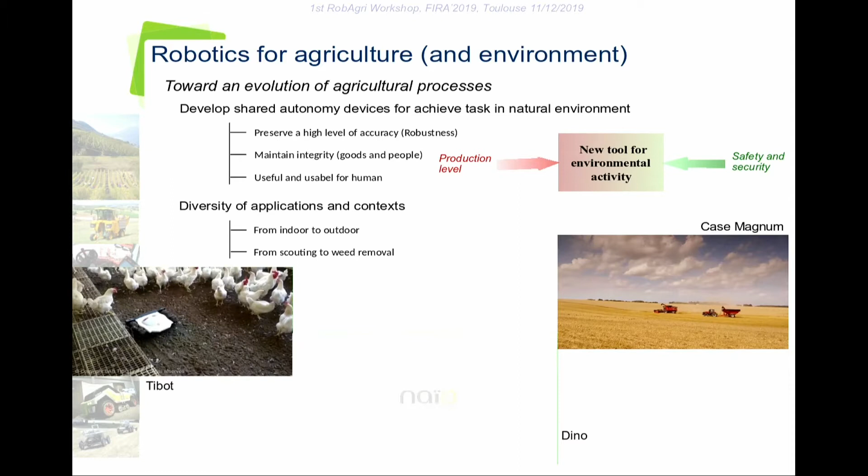Robotics can help with that, because if we want alternative solutions to use treatments and have agricultural processes without chemical products, that means you have to go into the field more often and make very accurate work. That means you have to spend a lot of time in the field, which is not possible right now because you need more and more manpower, and it's manpower for a very difficult, hard job with increasing penability.

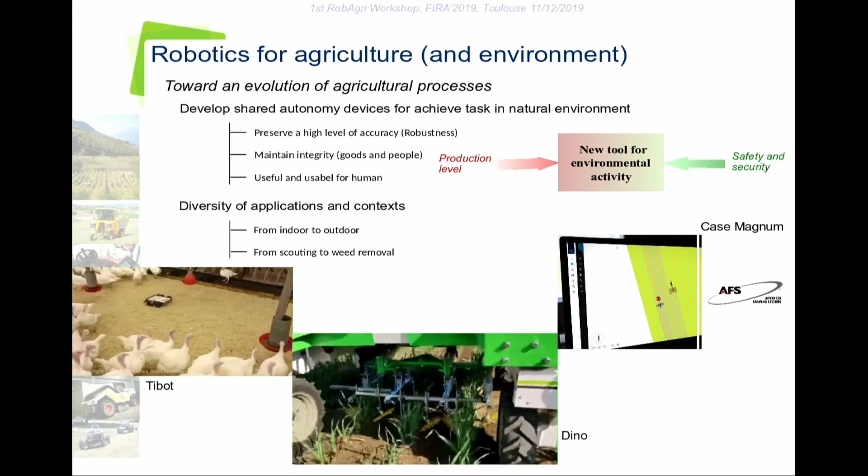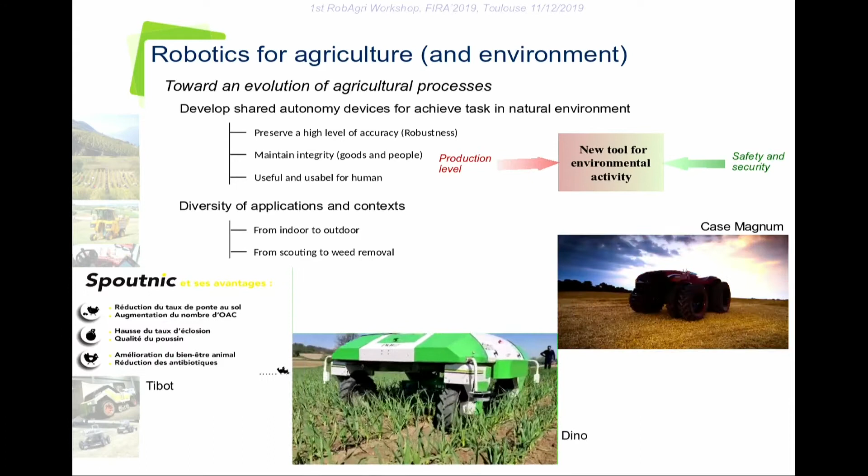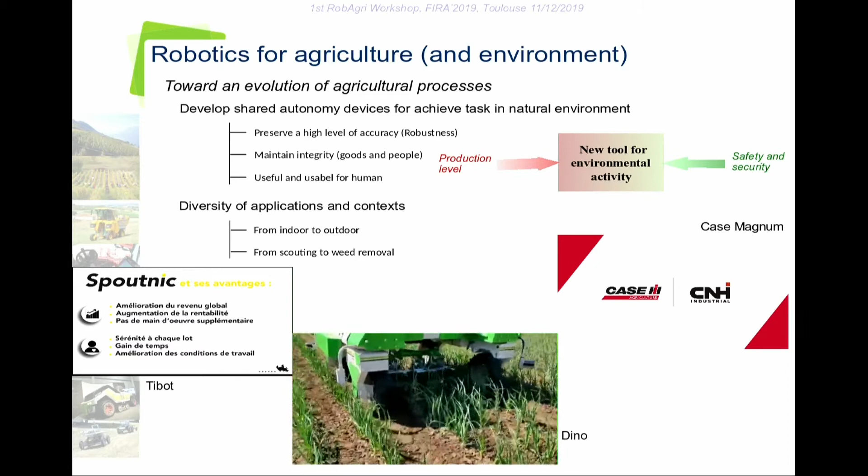So robotics can be one of the potential ways to move toward agroecology and biological agriculture. In fact, there are already a lot of robots in the fields and farms. You have seen this because we are at the International Forum of Agricultural Robotics, so you've seen there are many kinds of robots present, showing a big diversity of applications.

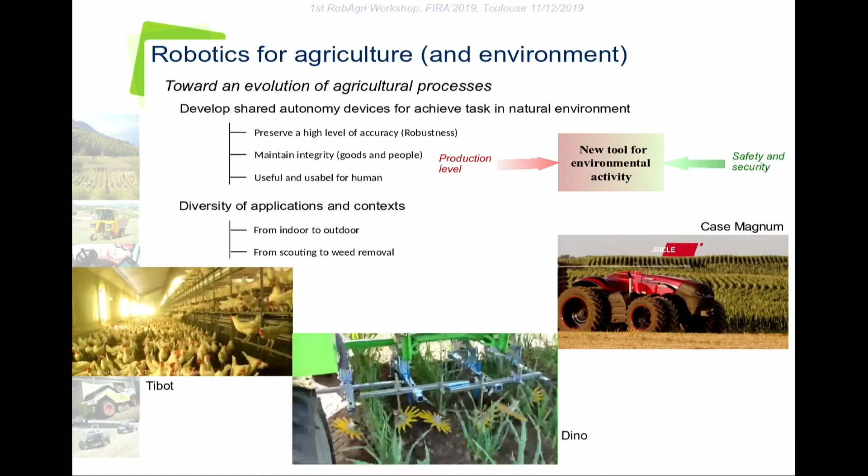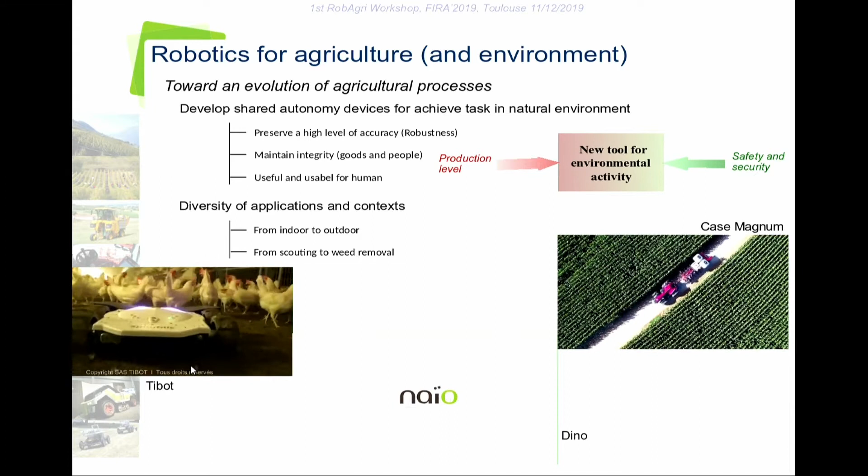We have a small... okay, I tried the pointer for the first time, it's not so easy. You have a big diversity of applications and things to do. You can see in the hall the small Tibot robots, just to move inside the farm and make chickens move, and so on—very small robots. There are also middle-sized robots.

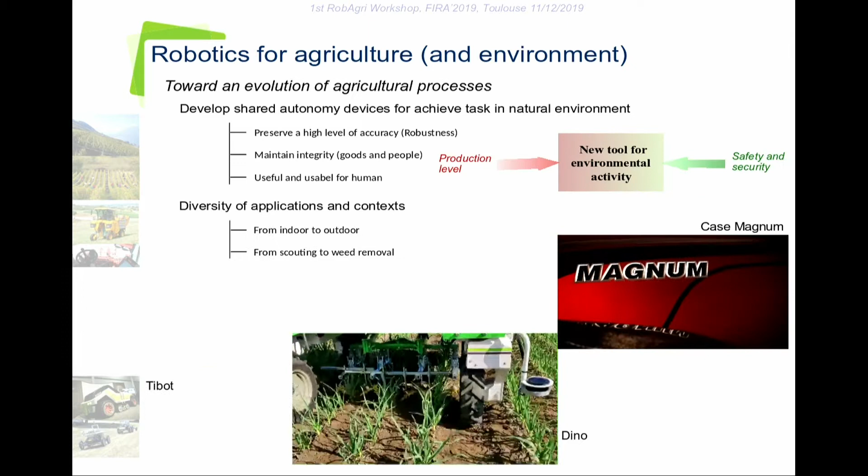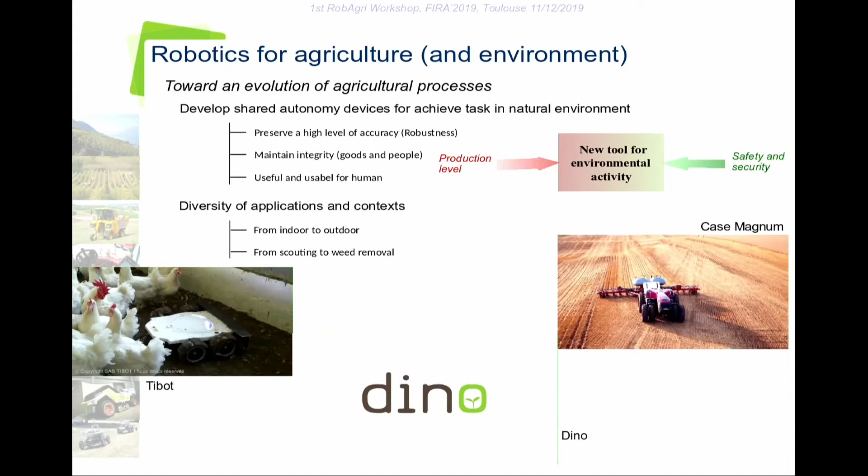Of course, we are in Toulouse, so you can see Dino robots also inside the hall—a robot dedicated to going through the fields for weed removal tasks. So here we have robots of about 10 kilograms, robots of about 500 kilograms, and at the opposite extreme, very large robots such as the Case Magnum, which is used as an automated tractor.

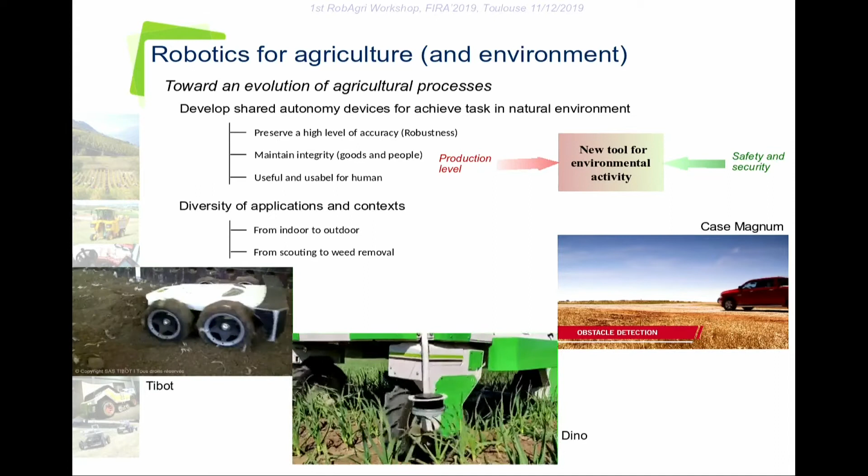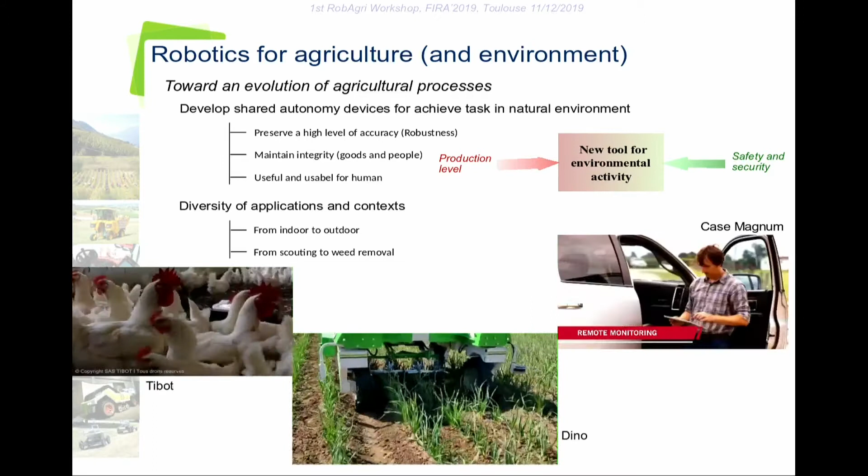The idea is that it's able to do exactly the same things as a conventional tractor, but without a cab and without people. These few examples show that if you want to manage robotics in agriculture, you have many different kinds of terrain with different shapes. You can be indoor or outdoor, in wet or dry conditions, with sunny or rainy skies—a huge collection of different conditions that the robot has to adapt to.

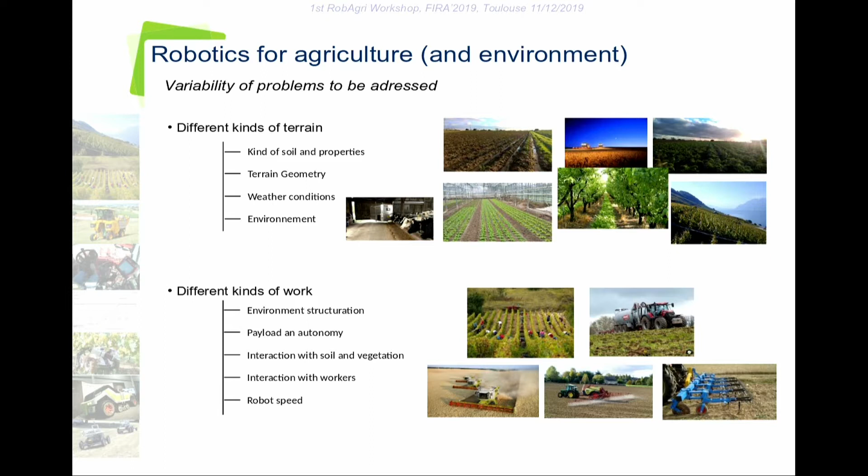The robot also has to adapt itself to different kinds of work. We've seen it can move chickens, follow people to help them do things, do mowing, do planting, work at different velocities, and use different tools and implements. So there is a huge collection of tasks to do and a huge collection of environments in which we have to move.

In order to address all these kinds of conditions, it is difficult—there are some scientific locks. One of the first scientific locks is that robots have to take into account this variability and diversity of tasks and fields. I've put some examples, mainly from the RobAgri association and its partners.

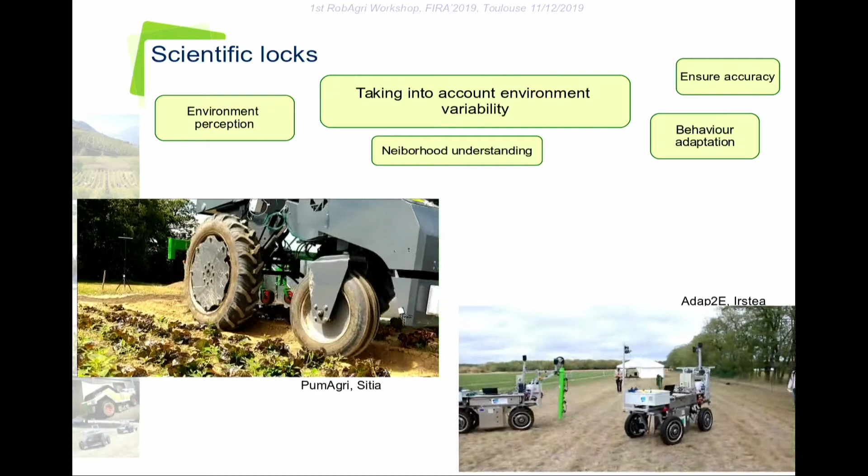For instance, in the PumAgri project, the robot has to move along rows using a laser. At the end of the row, it has to perform a turn, so it can't use the laser anymore and has to switch from laser-based trajectory following to absolute trajectory following. You have to plan, then decide and select different behaviors with respect to the space—where you are in the field—and with respect to the situation, what you have to do.

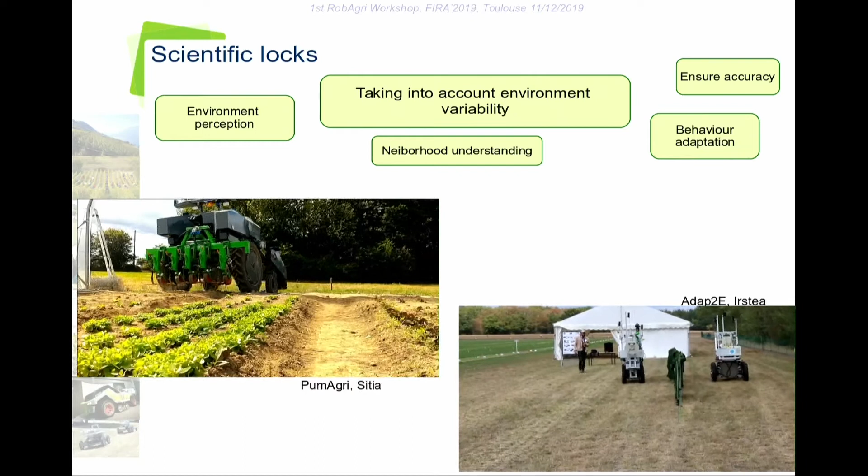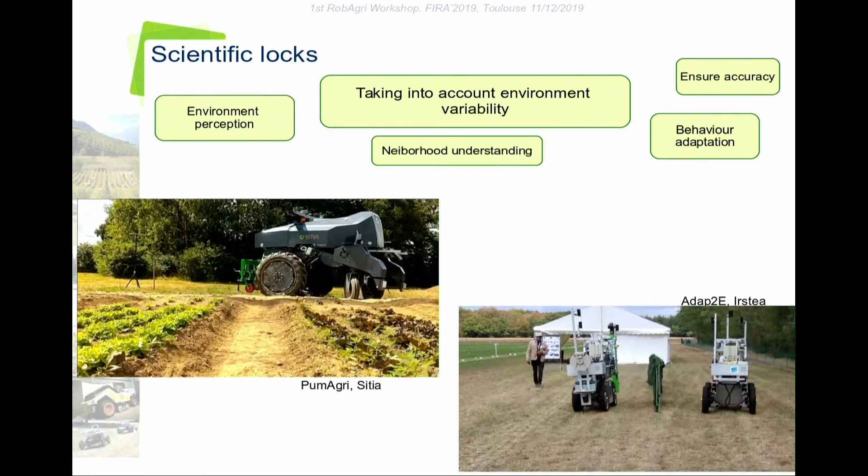It's about the same with the Adap2E project. We have one robot following a row of vegetation—currently artificial vegetation—which can perform spraying, in association with a second robot, so we also have to make decisions: do we have a structure to follow using LiDAR, or not? Do we have a second robot, or not?

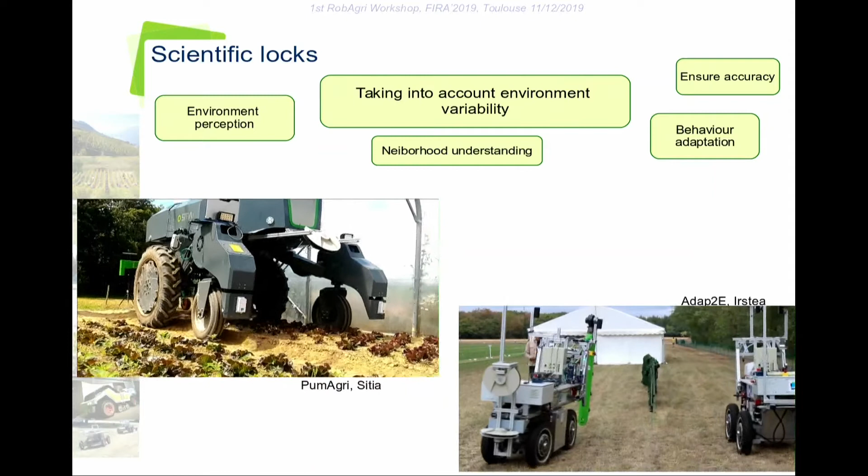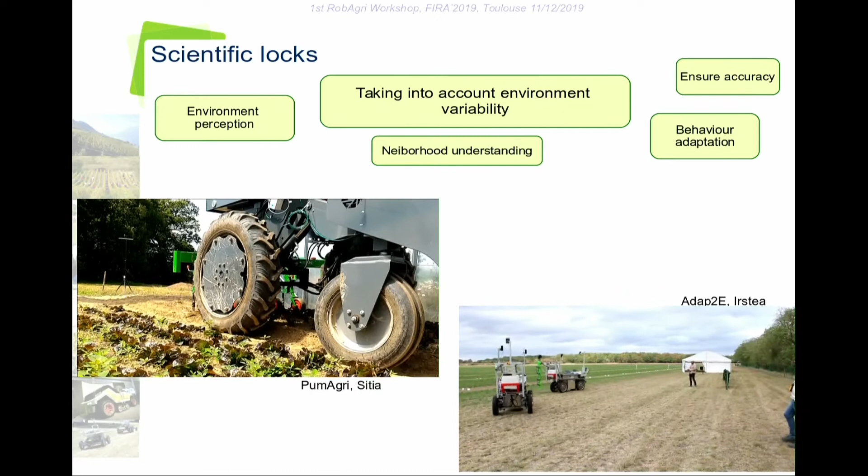Does the second robot have to be on the side of the first robot, or one behind the other? You have many decisions to take, and this is still scientific work because we have not yet totally solved the problem of decision making in unexpected, dynamical contexts such as we have in agriculture.

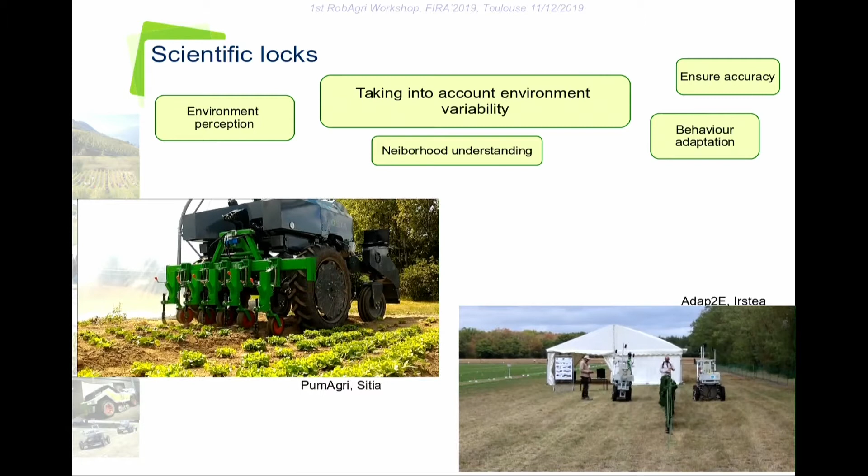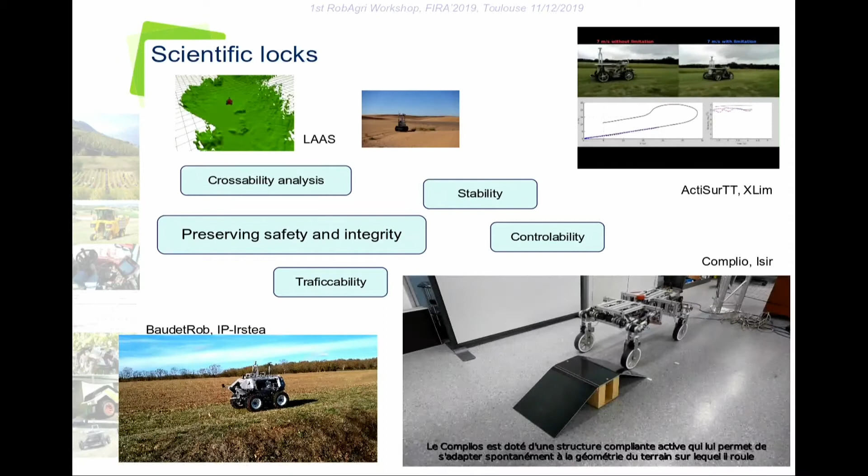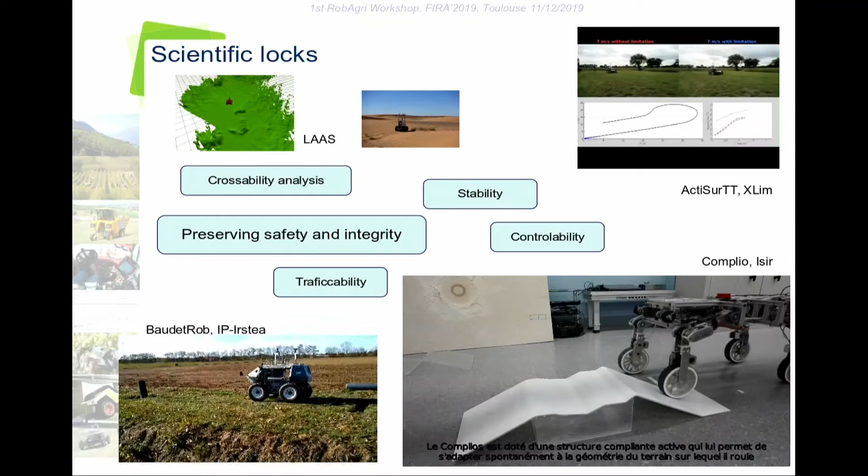One of the second important scientific locks is safety: how to preserve safety and integrity of the robot, how to be sure there is nothing in front of it. There is still progress to do, maybe in the numerical terrain model, in order to see the geometry in front of the robot, since it has to know what is in front of it to decide if that space can be crossed or not.

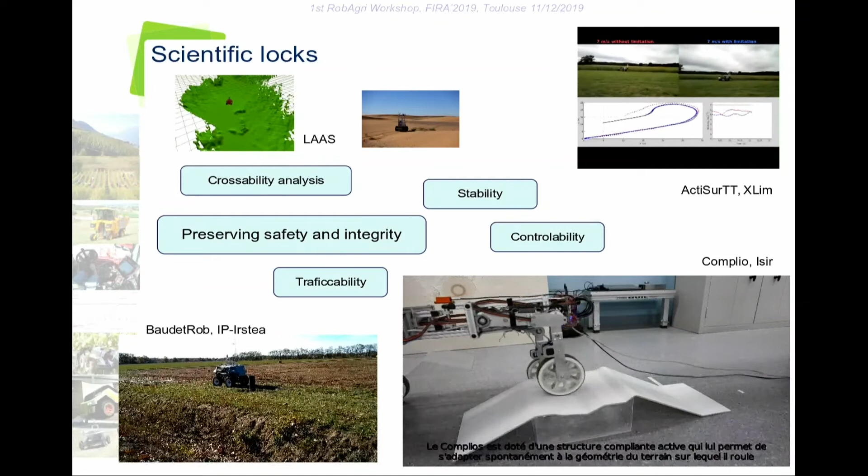So we have a lot of work on these topics lately. We also have to take into account the dynamical effects of the robots: what is the maximal velocity you can move at in order to preserve stability? We have an example with the XLim laboratory and IRSTEA, one result of the ActiSurTT project.

It's not easy. Here we find the maximal velocity with respect to preserving the stability and controllability of the robot, because depending on grip conditions, you can turn very fast, and this can lead to a spin around.

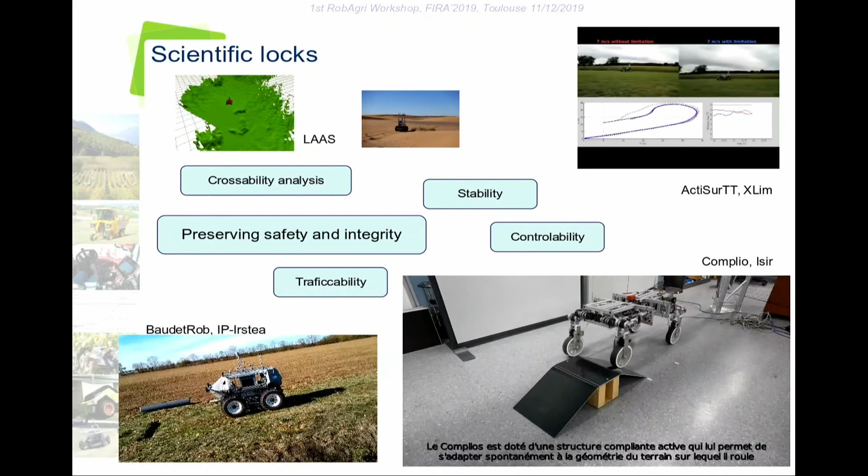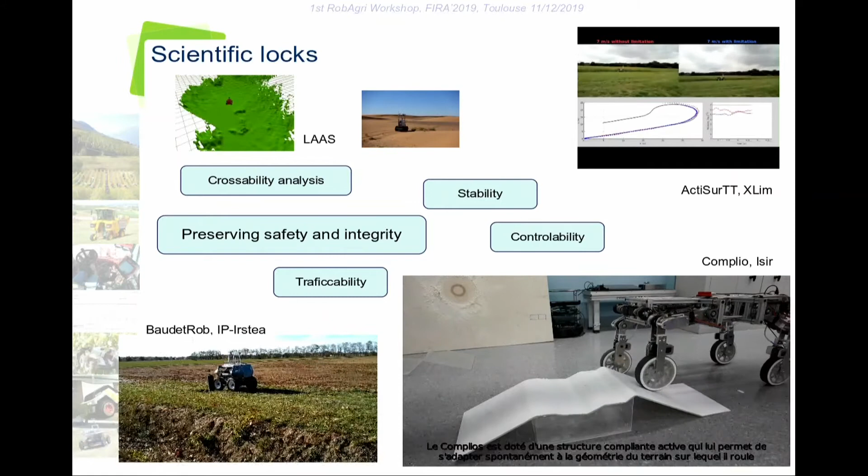Or loss of controllability, or steering actuator saturations. We also have to decide at a given moment what is the maximal speed to cross a geometry. Here you can see we are doing research in RobAgri about the maximal velocity to cross a hole, or the maximal velocity to cross these obstacles - sometimes it's zero, because you have too much angle change, and then you have to avoid it.

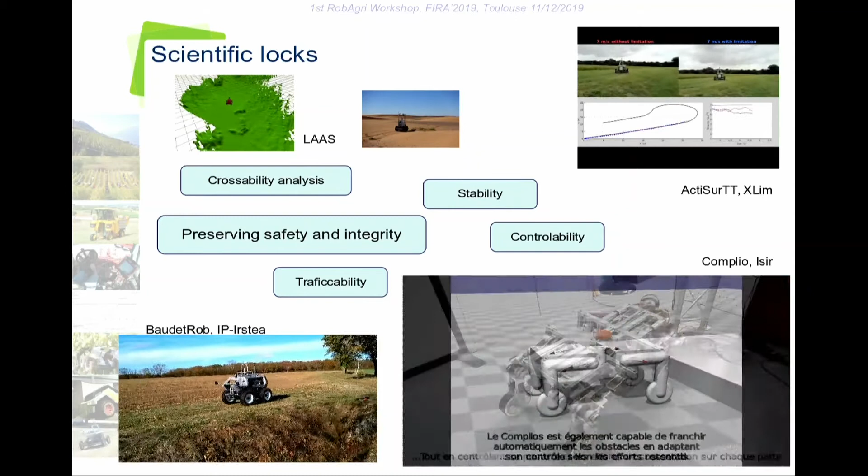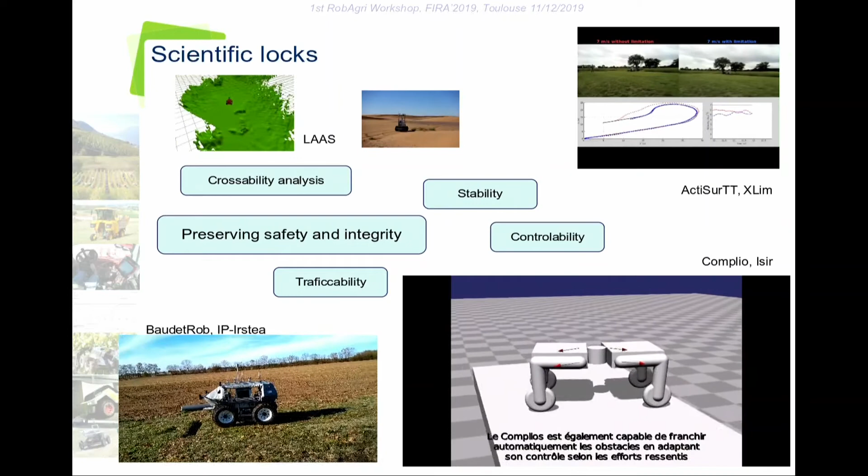We also have research led by Isir in Paris about reconfigurable robots and wheel-leg robots, which permit adapting the position of the center of gravity, including its elevation, with respect to the obstacle.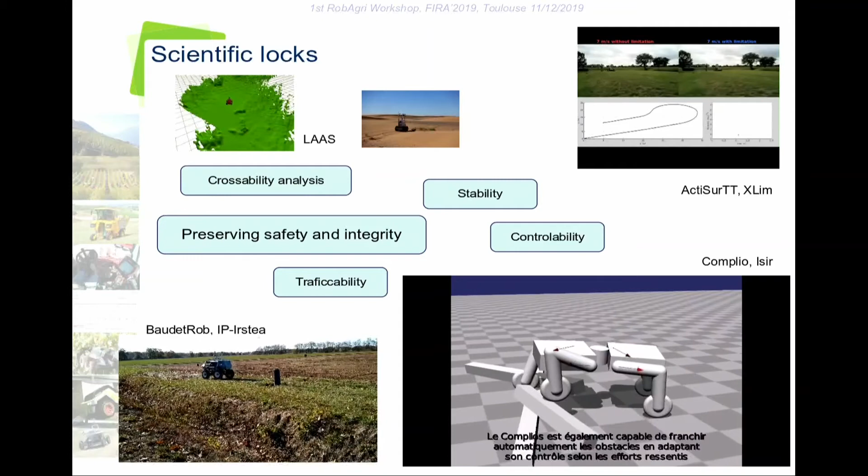This is basically done with deep learning, using simulation: the robot crosses nominal obstacles and learns how to change the position of the leg with respect to the obstacle and with respect to onboard sensors - basically force sensors.

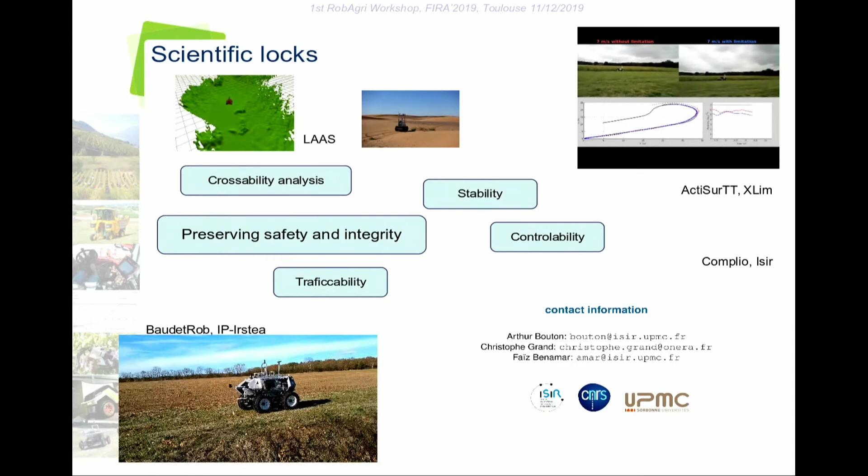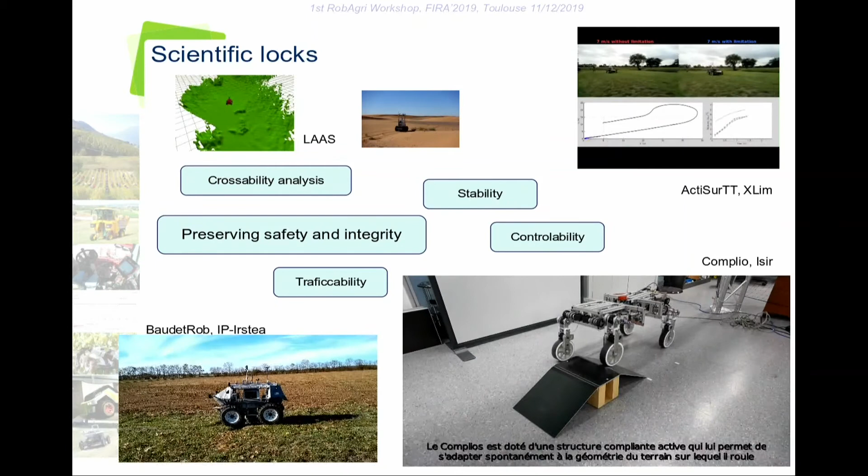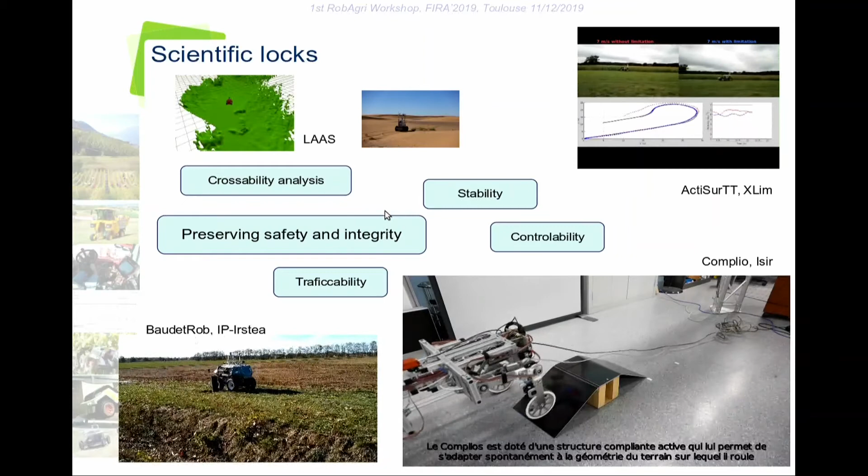Then, once all the learning is done through simulations, you can move on to actual experiments using the Complio robot you see here, which is able to change the position of the wheel with respect to the terrain geometry, in order to preserve stability and horizontal positioning of the robot.

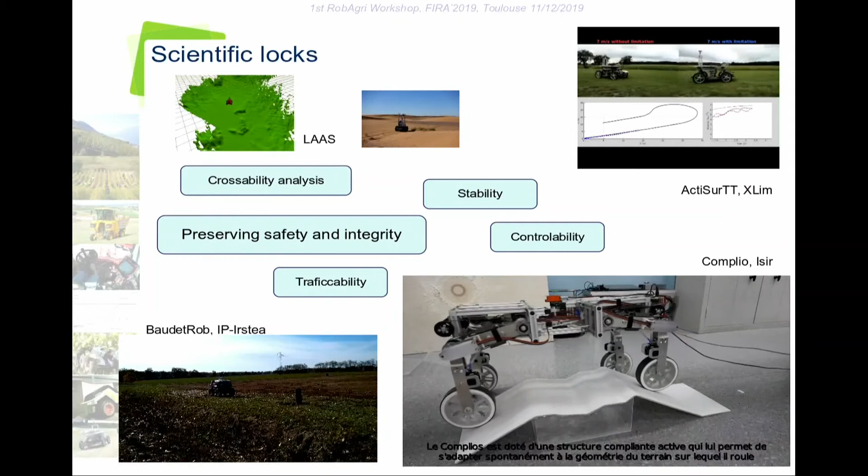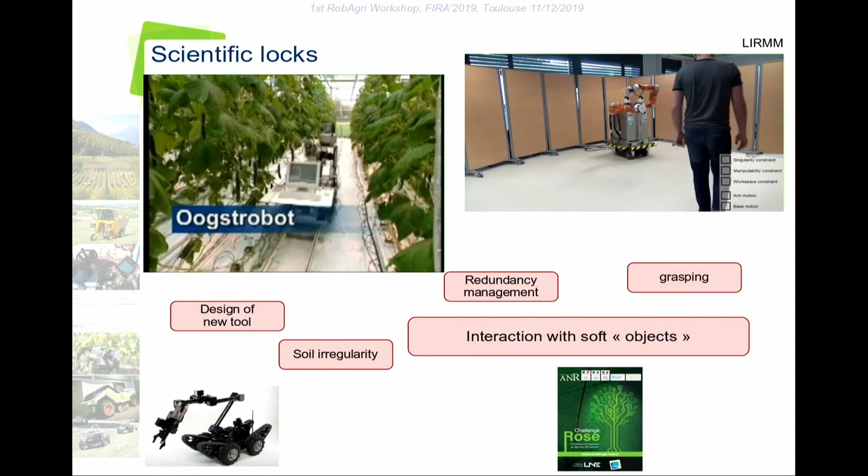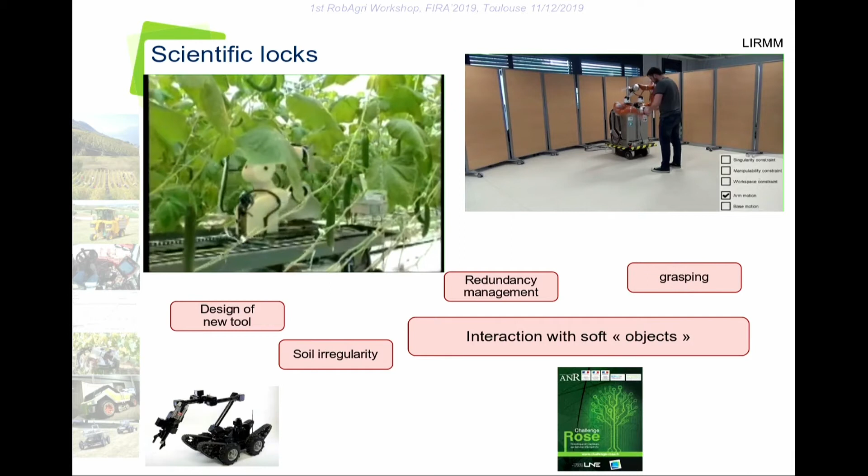So this is the second of the main scientific locks. The third one we have identified in RobAgri is how to interact with soft objects - how can you manage the interaction of an implement with vegetation and with soil, because the main task in agriculture is to interact with and do something on the fields.

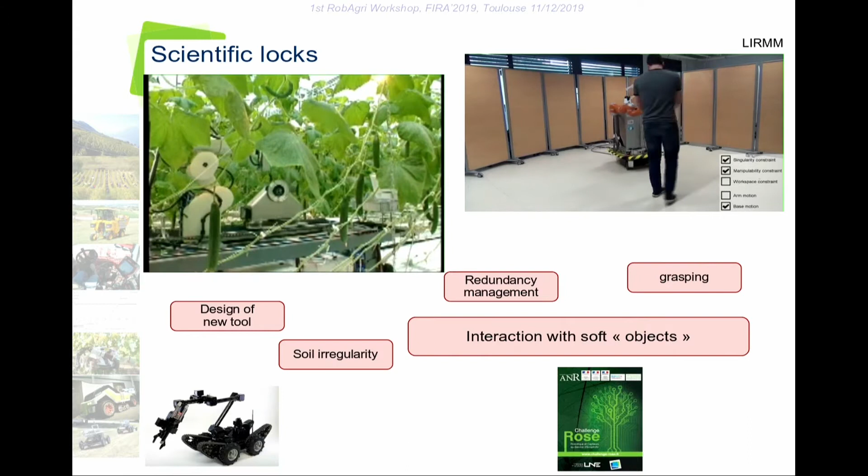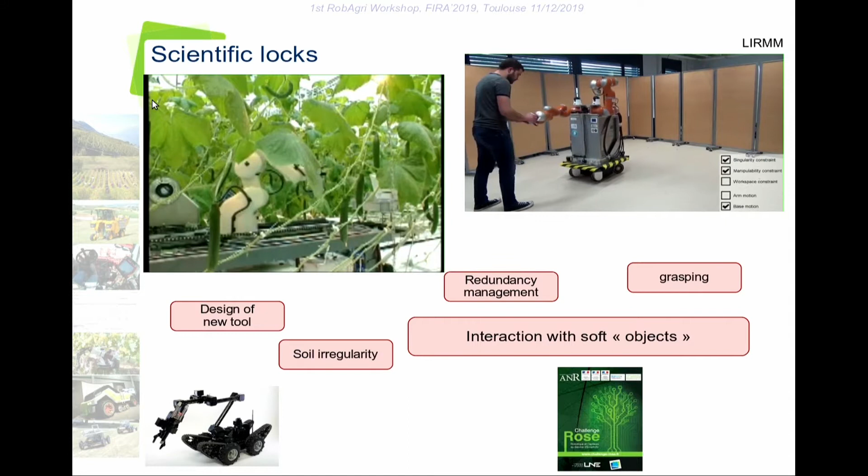We'll go on this topic this afternoon, but you can see that mainly this is addressed nowadays by having a mobile platform which moves, then stops, and then a manipulator or arm robot does things - not directly taking the vegetables, but using specific mechanical designs developed to permit that.

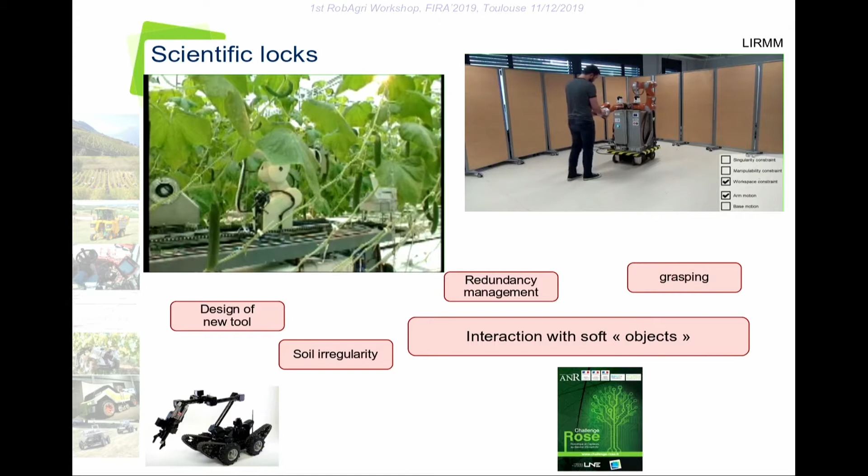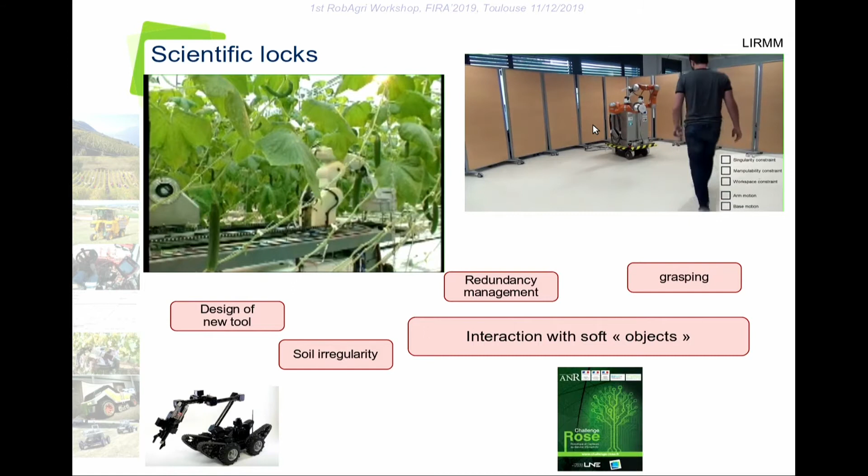We also have research, at LIRMM in Montpellier, on how to manage cooperation between the contact of a human and the motion of a mobile manipulator. I think this is quite important if you want to start working with cooperation between humans and robots.

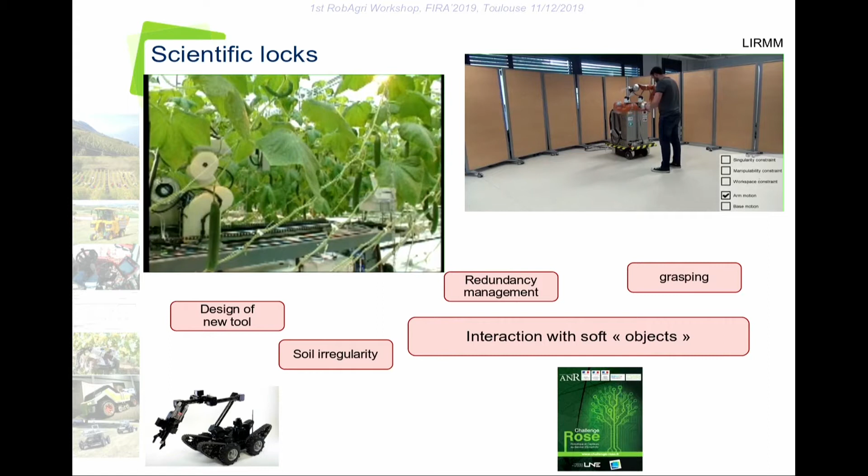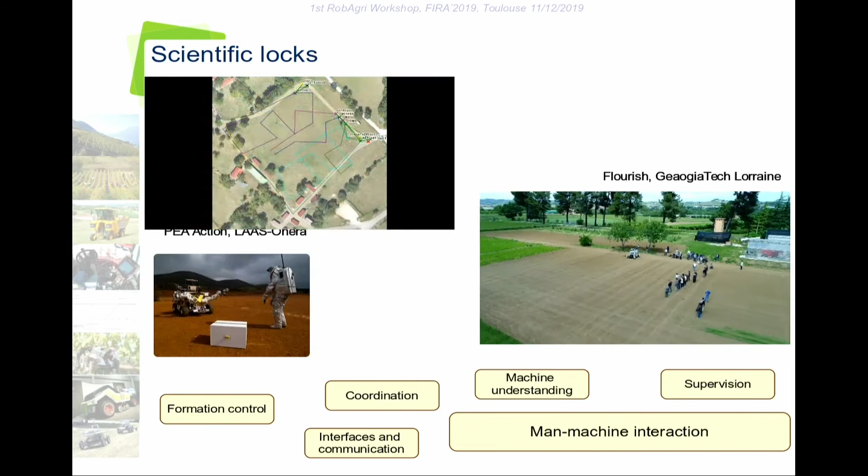This is precisely one of the fourth scientific locks, mainly based on man-machine interaction and coordination of multiple robots. Because if we want to take benefit from robotics in agriculture, using solo robots alone may not be sufficient. One way, as shown before, is to consider the automatic tractor: instead of a manually controlled tractor, we have an automatic one doing exactly the same kind of agriculture we do now.

A second possibility is to take advantage of the robot's capability and say: instead of big machines, we can have several small machines able to connect to each other, able to do things more slowly because it's robotic time - a robot has all the time it needs, which is not the case for a human.

And then there is much research about human-robot interaction: how to supervise a robotic task, how to help robots in difficult situations, because it's clear that at a given moment robots won't be able to do everything by themselves - at some point they won't understand what's happening, and it's preferable that they ask a human what to do.

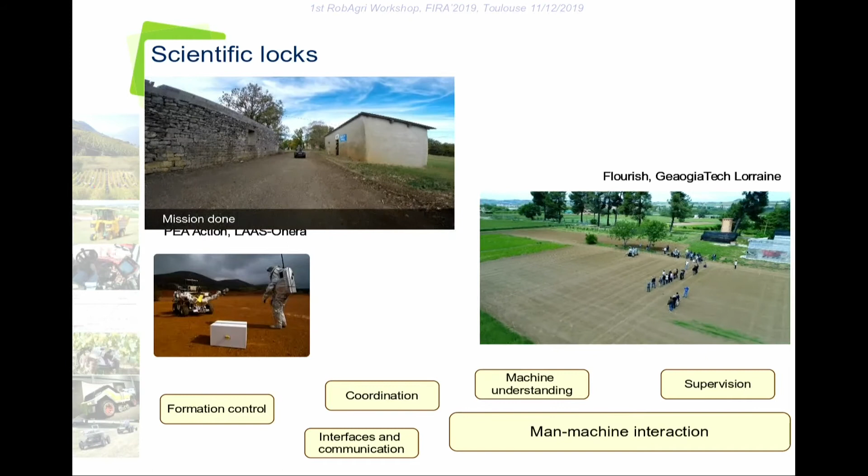It doesn't have to ask that every 5 minutes, because that wouldn't be applicable. But sometimes it's much better than robots taking a wrong decision - the human has to make the decision, but the robot has to know at which moment it can't decide by itself. I'm not sure that I'm being totally clear - do you understand?

Sorry once again for my bad English.

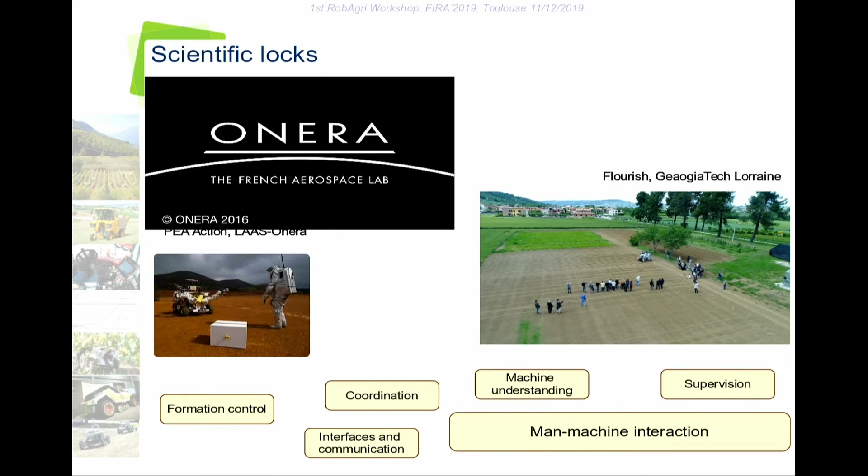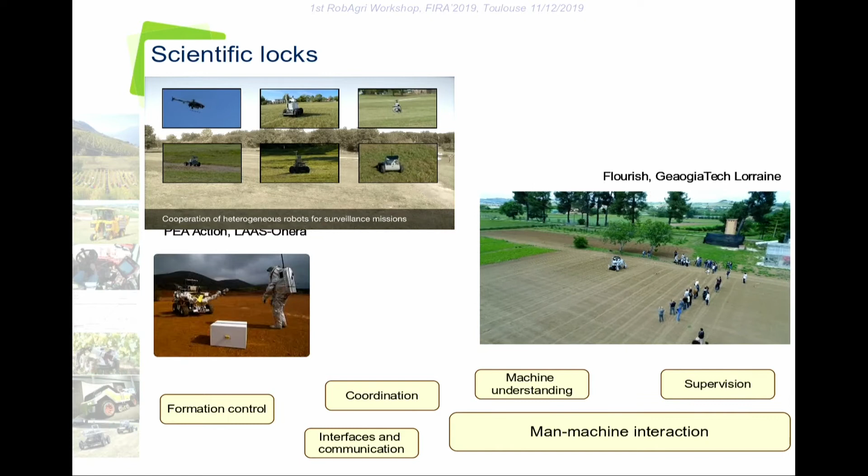Another thing is to enhance the autonomy of robots. One important thing is to see the scene from a different view. If you stay at the robot level, you won't know everything in the environment, and it will be difficult to make decisions. One interesting thing is to have cooperation between robots on the Earth, but also between robots in the air and robots on the soil.

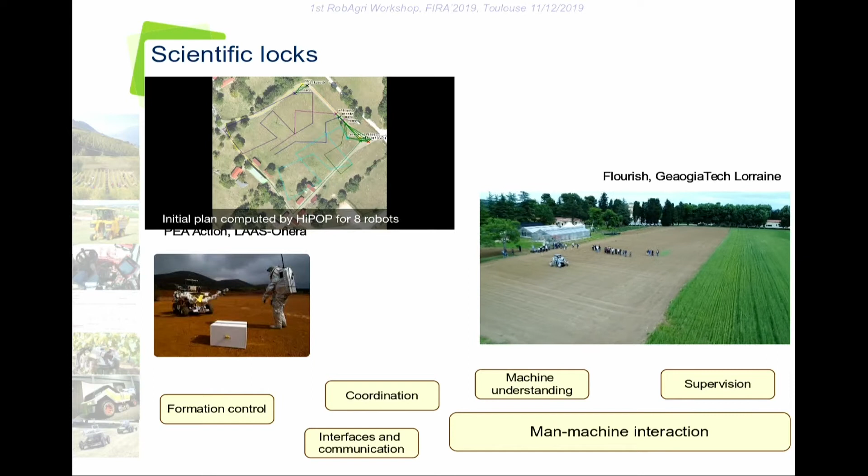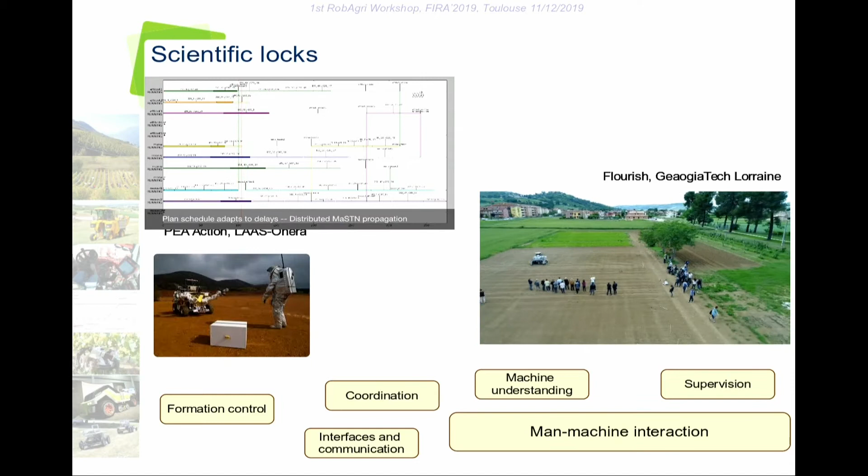There are several projects, with LAAS and ONERA in the PEA action of cooperation. It's not for agriculture, it's for military applications, but there are some connections between military and agriculture anyway. There is cooperation between aerial robots, which are able to see what's going on Earth, and how they exchange information with respect to terrestrial robots.

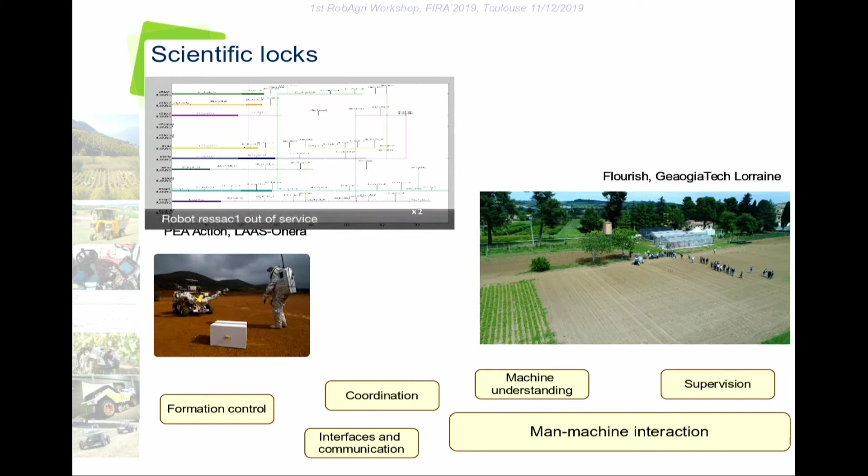There is another project led at Georgia Tech Lorraine about cooperation. It's also a European project with DeepField, about cooperation between drones. I don't know if you can see it well.

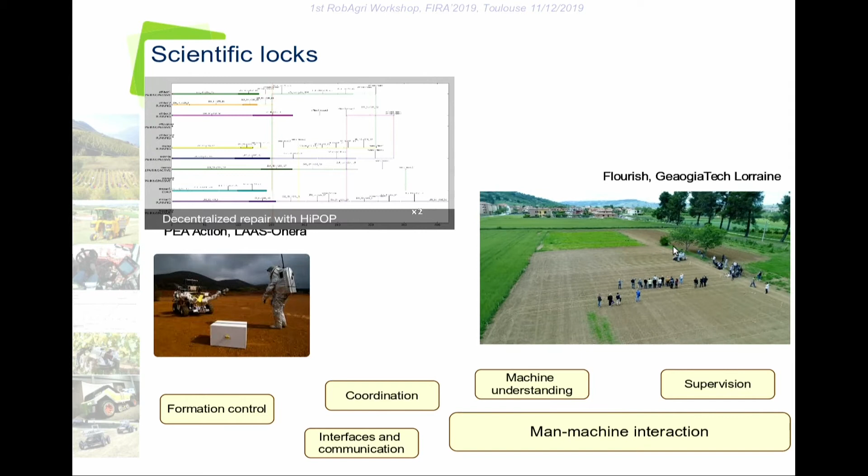So there is a drone which is taking the movie of a second drone. The second drone is here, are you able to see it? It's just above the robot. This permits taking some pictures and saying, okay, you have to do things there, there, and there. So there is a planification. This permits the terrestrial robots to actually do things.

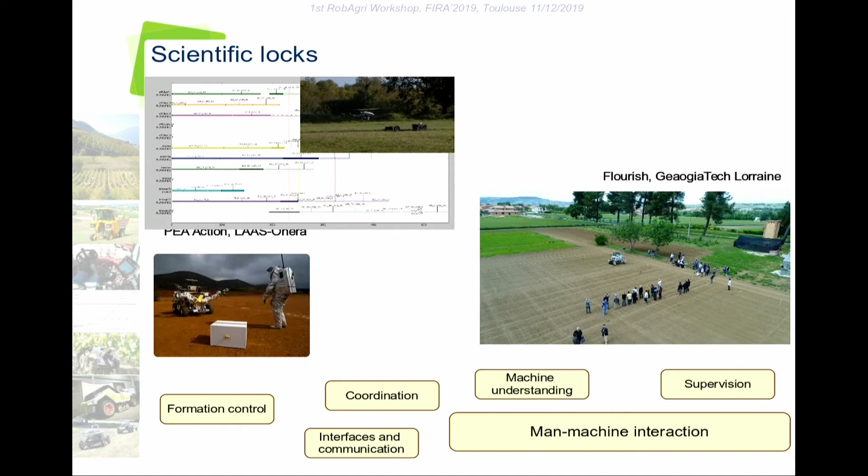So we see that there are some scientific gaps. We still have some jobs to do in research, which is good for me since I am a researcher. There is this collection of hot topics we have to go further into, in order to enhance the autonomy of robots and permit them to move in different kinds of environments, giving them the possibility to do several kinds of things and address all the problems of agriculture.

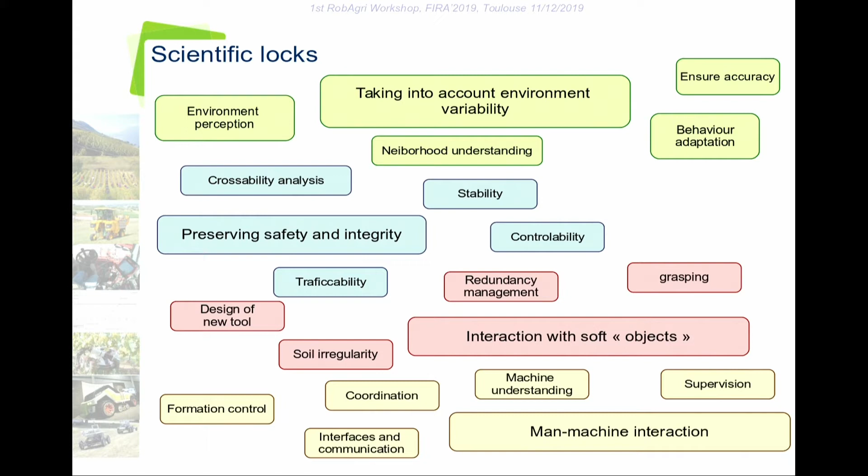But there are also some social and societal questions on whether robots can be applied on the farm. What are the conditions which will permit robots to go into farms and be used by farmers? There's the problem of the cost of machines—if you use several robots, or have to develop new technology, the price won't be exactly the same as conventional machines, even if they don't do exactly the same thing. There's also acceptability: will farmers be okay using robots?

Do they know how to control robots, to interact with robots? So you have to develop user-friendly interfaces. And there's also the problem of tuning the robots and ensuring maintenance. There is very little difference between good tuning of a controller or perception algorithm, which permits the robot to work properly, and a bad parameterization, which makes the robot fail its mission.

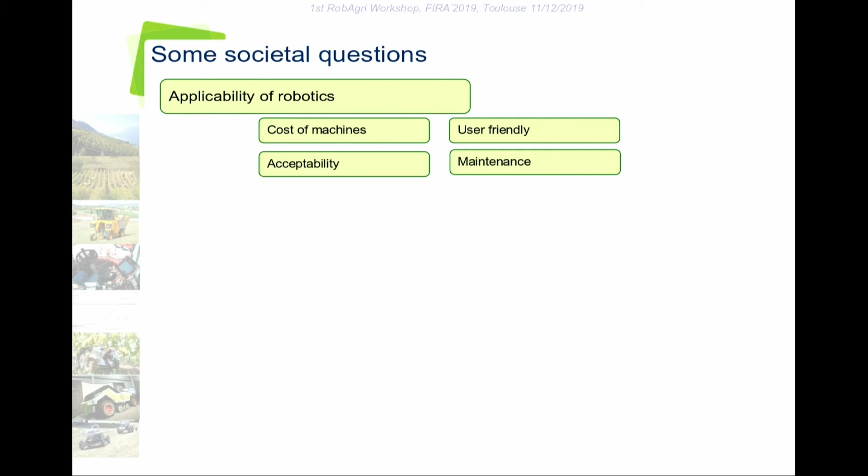Another big societal question is how the use of robots will impact the agricultural process—how we organize a farm in order to welcome robots, and how the use of robots will impact how the agriculturalists work. Another question is whether the robots are efficient in the process.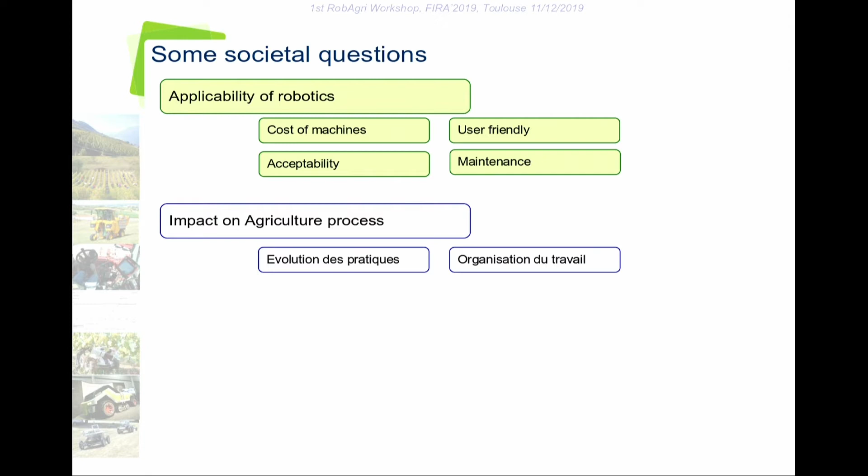In terms of agronomy, is there an interest in using robots? Do they perform an efficient task? Another point is how to put the robots on the market—what about commercialization? We have to ensure that robots are safe, that they will move without hurting people, without destroying the environment around them.

This is to ensure safety, but we also need to find metrics in order to see if robots are really efficient. And if we want to commercialize robots, such as we commercialize agricultural machines today, there are performance evaluations—we say, okay, we go through this test, so we can say that this machine is efficient or not, and it should be the same for robots.

We also have to see how we manage the legal aspects—what is the legislation regarding the use of robots? Are they able to move on the road? For instance, autonomous vehicles are not allowed on the road in France, only on some parts of highways, and you need a special plate and special license. Will it be the same for robots?

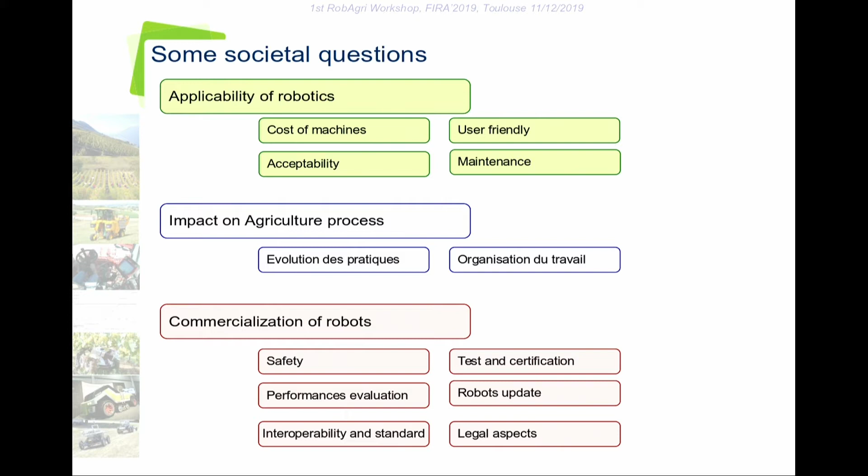How will we manage the update of the robot, the upgrade? Because of course technological aspects will progress, and we have to change the robot, to upgrade it, just as you update your phone, in order to have the best accuracy and the best efficiency we want.

So in order to investigate all these aspects—scientific, technological, and societal—we decided in France to create an association named RobAgri. RobAgri's president, Jean-Michel Lebars, is here, so at the end of the talk, hey.

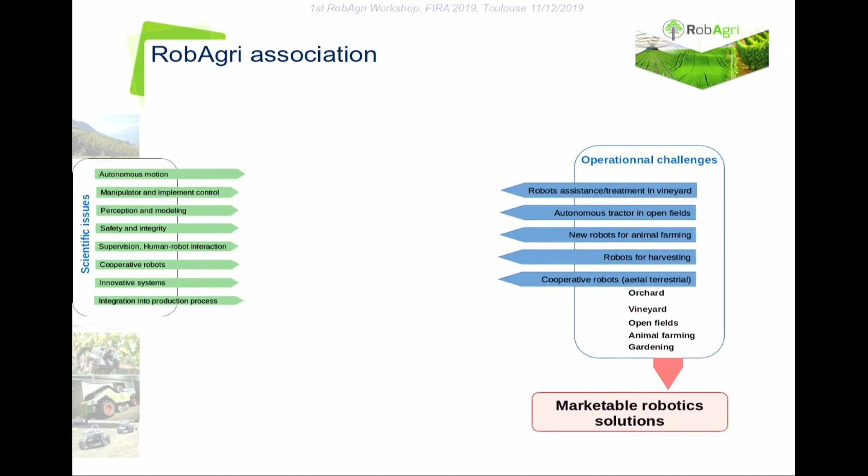In the middle, we have defined the RobAgri association, which is here to make networking. That's the first task, but also to put in common some means - simulation testbeds, testing testbeds, experimental actions, and being able to develop projects together. There are also fundamental activities about identifying scientific issues on difficult points.

There is action about the state of the art - what are the main advances? There is action about how we can manage a common software architecture to have a common framework for controlling the robots and to share some efforts.

We also have a lot of action about how we will qualify the efficiency of robots. What tests have to be done? What test beds and infrastructure do we need to develop to test these robots? There is also a big issue regarding standardization and legal aspects.

One of the objectives of the association is to put together the idea to propose standards and say, okay, if you want to be safe, authorities have to propose this kind of standard, and it's acceptable for us because we have discussed it before. There's also a big action about formation and dissemination to promote robotics in agriculture.

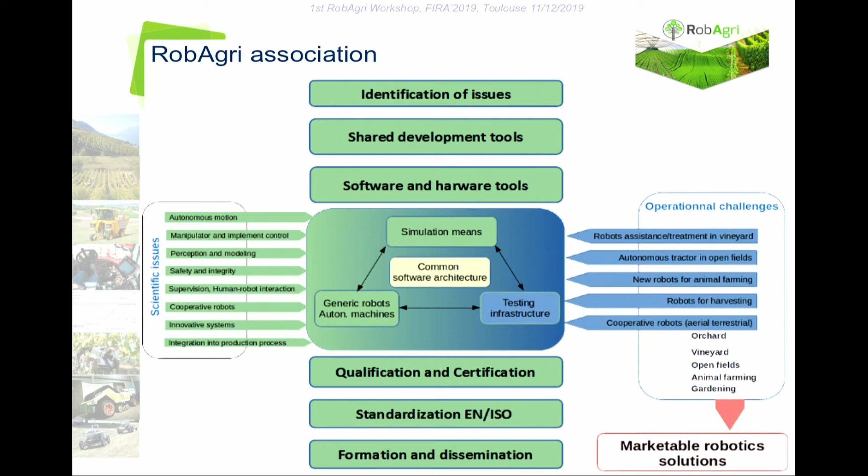The association counts 64 members - it's increasing day by day, so I look at the president to be sure it's 64. Tomorrow it will be 100, something like that. So do not hesitate to come and discuss with us and apply to become a member of RobAgri. It exists since 1.5 years, something like that.

We have started to have some first results, first activities. At the scientific level, we have developed a mapping of needs, lacks, and competencies and expertise present in the framework of RobAgri with respect to all the members.

There are manufacturers who have competencies and expectations. We have startups who propose robotic solutions. We have suppliers who propose solutions for specific points. We have research laboratories who are researching and finding new algorithms, potentially to be put on the market in the near future. We made this mapping to know who needs what, who can propose what, and where the efforts are needed in research and development.

We are also working on the edition of a position book - it's a translation of livre blanc in French, I'm not sure of my translation. We expect to edit this book by November for the SIMA show.

We are seeing if it's possible now to start working on a common framework to share control algorithms and perception algorithms, in order to test them in a common way.

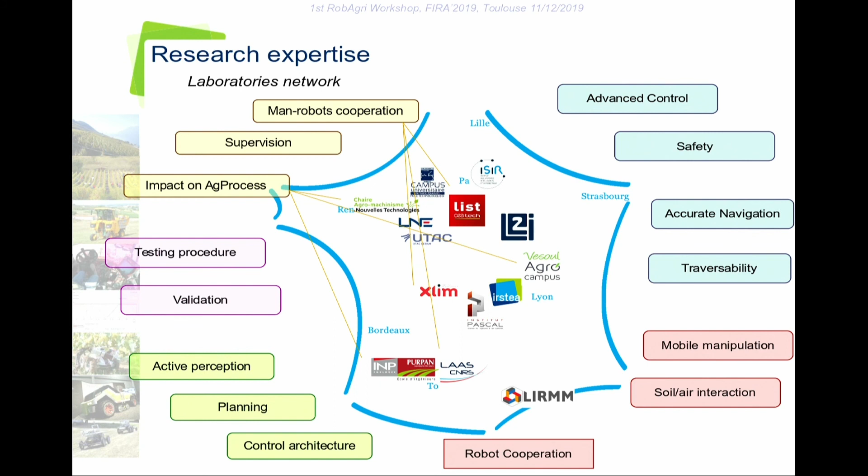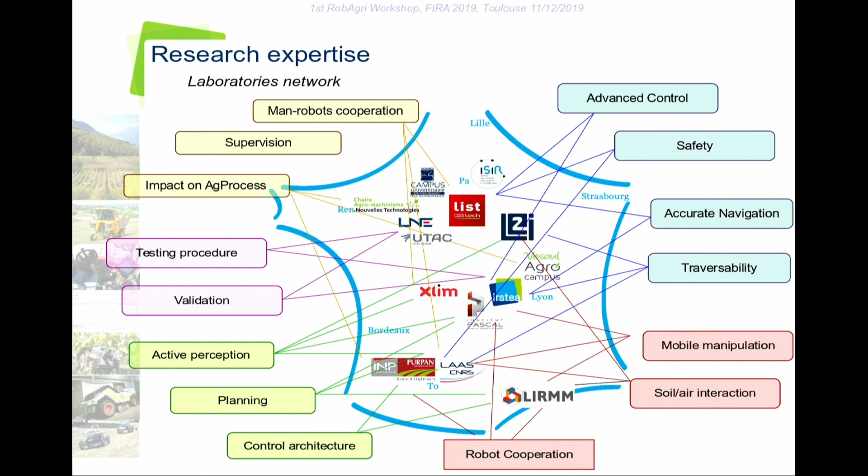Okay, so if you want, I guess we can share after the presentation, the French map about research in the framework of Robagri. It will be possible, I guess. We can put it also on the Robagri website.

So in order to see what are the advances in this kind of scientific locks, we organize today - because it's one of the objectives of the Robagri conference - we will investigate today some of these points. So this is the first workshop of the Robagri Association.

And then we have tried to build 3 sessions, one about the safety of off-road robots, one about the planning, supervision, and control. So the idea is also to see how we manage the complexity and how we are able to adapt the robots to their environment, or a fleet of robots to their environment.

There is a third scientific session about interaction and perception, how the robot can interact with the environment, and how we can improve the perception to permit the robots to take into account this kind of things.

And the last session, which is more on the structuration of the community. So Robagri tries to structure the agricultural robotics community, and we will have 2 presentations about a kind of state-of-the-art from a patent point of view about this technology, and the presentation of the agROBOfood project, which will be done by Frédéric Collet-Dany.